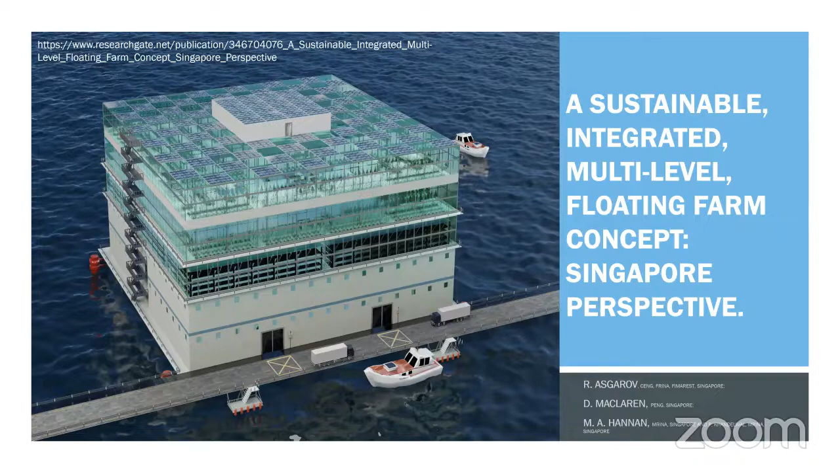Thank you and good afternoon. Today we will talk about floating farms. This is a project which we developed together with our colleagues from our Society of Floating Solutions, founded by Mr. Lim. So we did it together, and it is a job which is designed to demonstrate feasibility of concept. It's very preliminary, so please take a note, and then we'll talk about the numbers.

Everybody knows that Singapore faced a shortage of food, not a real shortage, but risk of shortage during COVID. Generally this is a problem of the entire world. Population is growing and food is in demand. So the government took note from this situation with COVID, and there was a program accepted that by 2030, Singapore is supposed to provide 30% of food locally. We believe that our floating idea to provide food is one of the ways to develop this in the future.

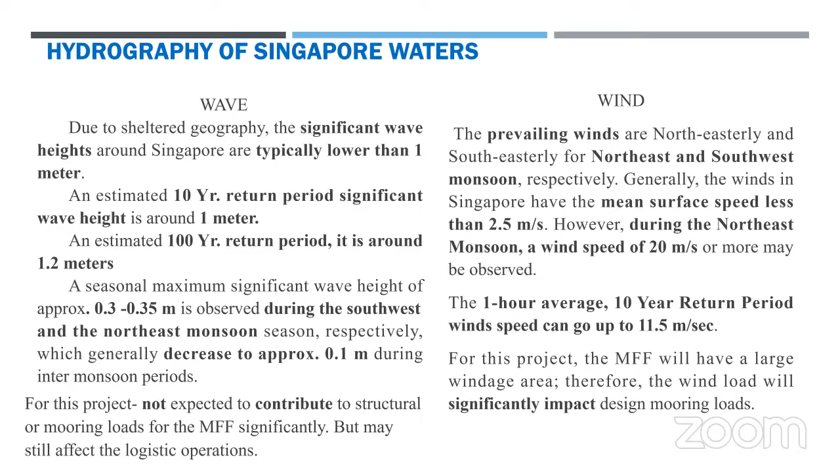Current here - normal current, tidal current is about 0.5 to 1 meter per second. But between the islands and some narrow streams it can go up to 2 meters per second. Wind-generated, non-tidal current is quite low, 0.4 meters per second. But generally the speed of 2 meters is significant and has to be taken into account for mooring load calculation.

When we talk about tides, tides are quite significant in Singapore - it could go from 2 to 3 meters high. But the nature of our project, the decision which we use in the mooring, makes it indifferent to tidal variation, and we will talk about this later.

Not all of this area can be used, we already talked about it. A lot of the area is dedicated for navigational purpose, security or political reasons that can't be used. But still there are plenty of places.

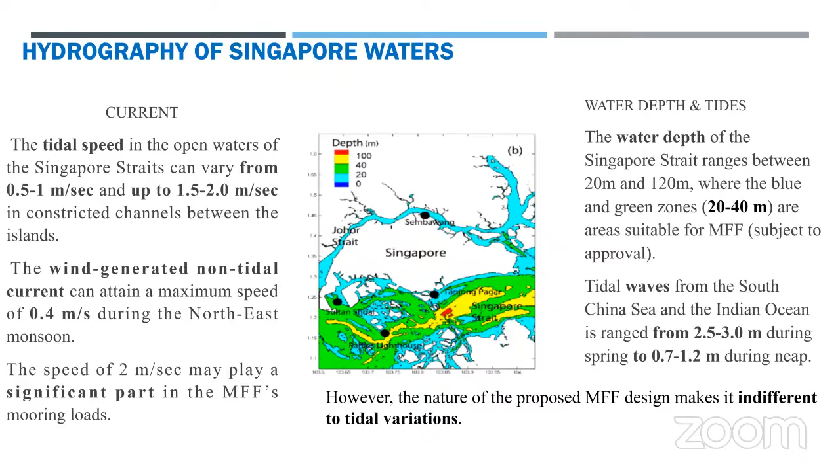This is how our project looks like. We have a 6-story floating farm.

Bottom level, it's not visible here. It's a double bottom and fish farm. First level is a loading bay. Second level is a chicken and egg production. Then two levels of hydroponics, indoor hydroponics. And top level is a greenhouse.

Greenhouse because we have a transparent roof, partially used by solar panels.

Access to this farm could be two ways. One of them is a floating road. If it's close to the shore, then using the floating road we can transport goods with normal lorries. If it's far from the shore, then it will be used by boat and by ships, all logistics.

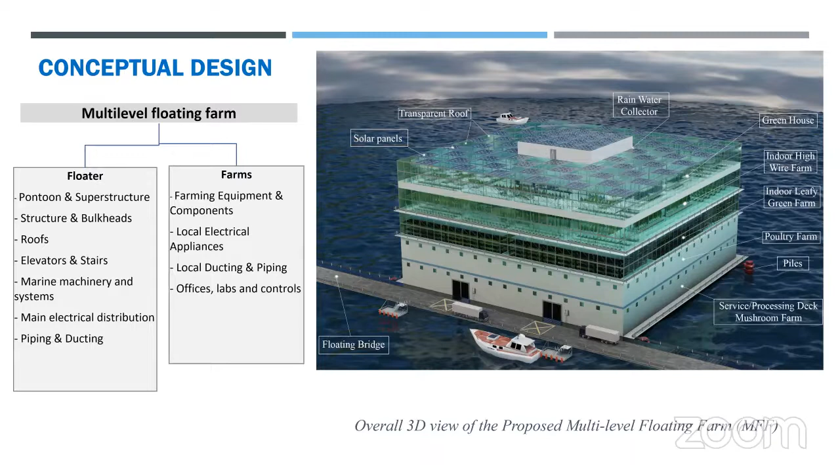Conceptually, if all project was divided by two parts: a floater, which includes structure and all machinery, shipping machinery, and a farm, which includes all farming equipment and everything for production of food.

We will talk about it later. And this is for human location, for laboratory, for personal staff, for workshops.

Overall size of this platform is 60 by 60 meters, which gives us 3,600 square meters total area. And inner part, which is the core area, is about 400 square meters. The rest of each level is 3,200 square meters. It's a production area, which is dedicated for production only.

Total displacement is 25,800 tons. And what I want to mention is stability. It's a metacentric height of 26 meters. It's huge. Normally rules require 0.2 meters to be safe. I would like to keep it in mind because we will talk about it later.

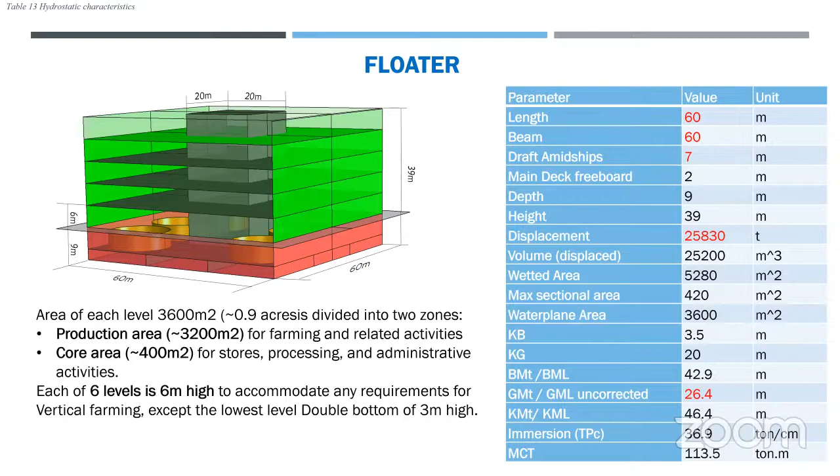So this is a total estimation of the cost of the floater. Of course it's an estimation, it's not based on the project drawings. It's based on the analogy, on the prototype. But it gives us some idea about how much it can cost. We believe it costs about 30 million plus.

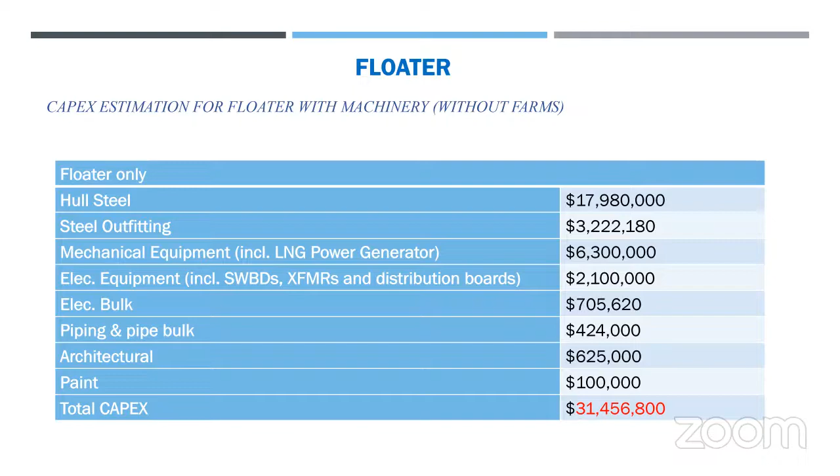Core area: we discussed about core area, and every level is 6 meters high. So far we have decided to divide the core area into 2 levels, 3 meters high each. Lower core is mostly for anything which is related to production. It could be laboratory, processing room, control room, anything which needs to be on the level of production.

Upper core is actually optional. It's more for comfort of the crew. If this platform, if this farm, is located near the shore, the crew can be delivered every morning and go home on the lorry in the evening. If it's a bit far, then we need to have a crew stay on board on watch. And for that we have an upper core with cabins and everything for crew living on board.

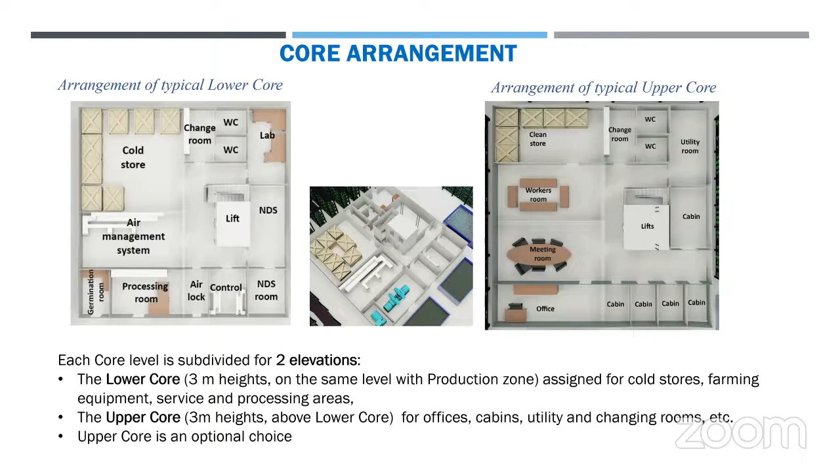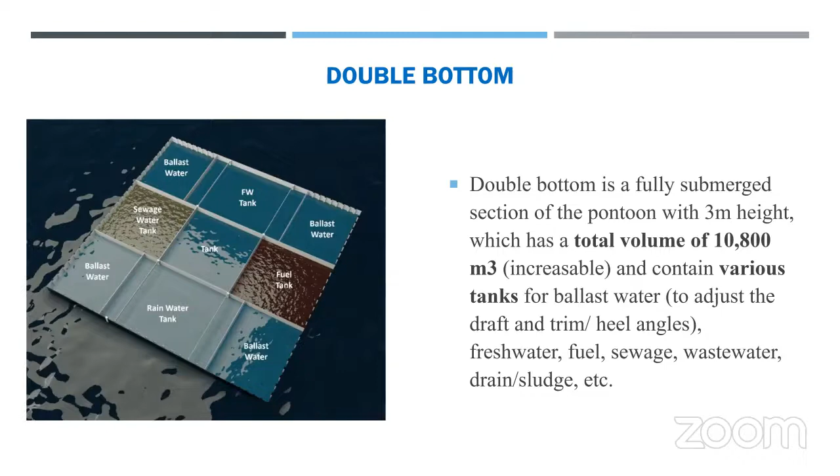Ground level: it's double bottom with the tanks. It's not an actual tank, it's just indication of intention, nothing else. But you can see that there's fuel there, sewage water there, fresh water, rainwater, and ballast tanks. Ballast tanks we need to keep the draft level on the same level with changes of loading. Total estimated volume is 10,800 cubic meters.

Ground level, level 0, it's partially underwater and fully below the main deck. It's a fish farm. It consists of 6 round tanks, total volume of 6,000 cubic meters. It consists of auxiliary equipment for fish farming, which is hatchery, nursery, recirculation system, feeding and control system, pumps, etc.

And also it includes some part of ship machinery. First of all, it's engine room, pump room, control room, switchboard room — something which is noisy. We keep it underwater. We don't go deep into the numbers, so just for information.

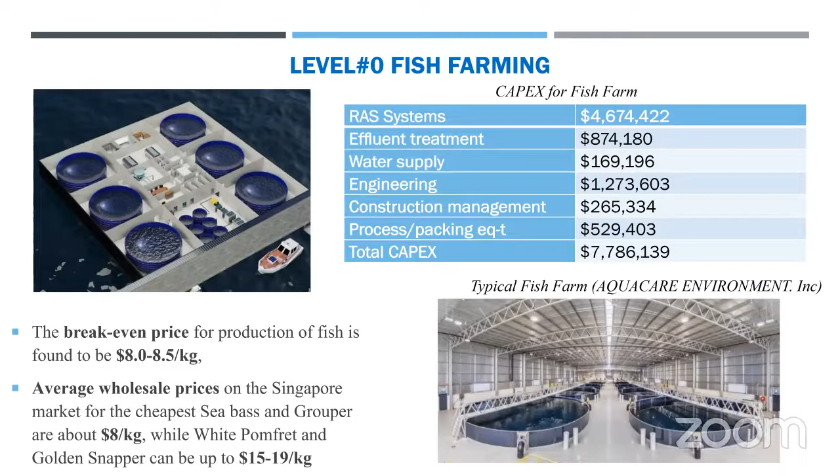Next level is the loading bay for lorry to pack it for general storage. Then we have another part of the machinery, the floater's machinery. And the rest of the room is occupied by mushroom farm.

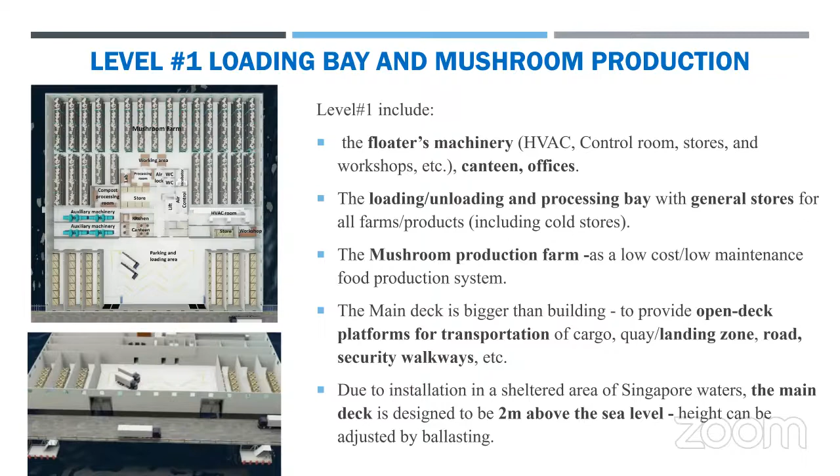Mushroom farm is a less demanded and cheapest farm. They don't need water, they don't need light, they don't need air, little bit. So it can be placed anywhere, but it's very important part of integrated farm. We will talk about it. This is typical farm, just somewhere.

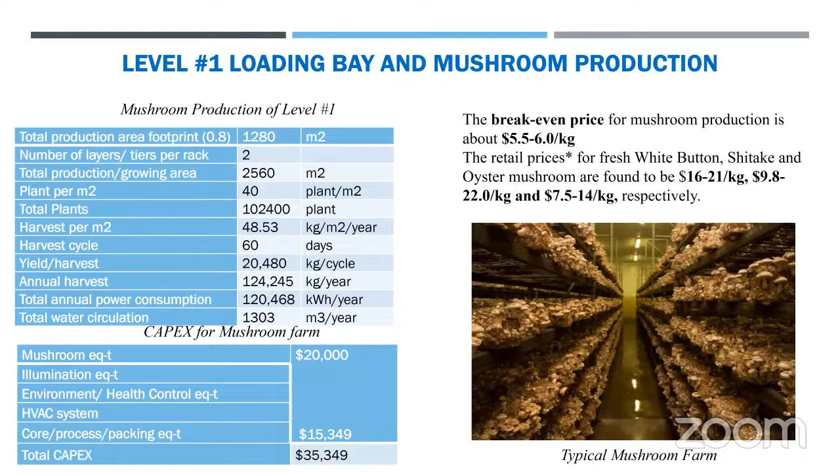Level 2 is an egg and poultry farm. It's a caging along the wall, which is where chicken stay. As a prototype for this project, we selected a high-tech farm, very expensive one, with automatization of the egg production cycle, including battery egg line, temperature control, scientific feeding and mechanized egg collection methods. This was done for a conservative approach in our estimation.

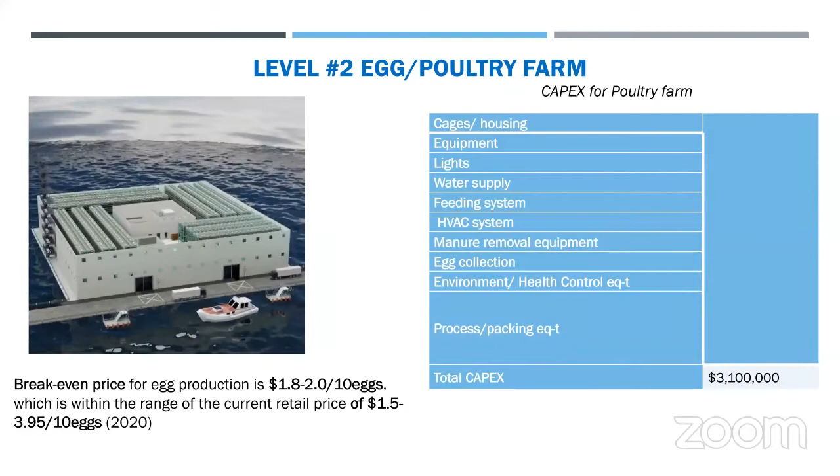Level 3 is a leafy green. We select lettuce production for this level. It is rows of shelves with the greens on top. We select 4 tiers per rack, which is 1 meter high, especially to get it more open for sun to come in.

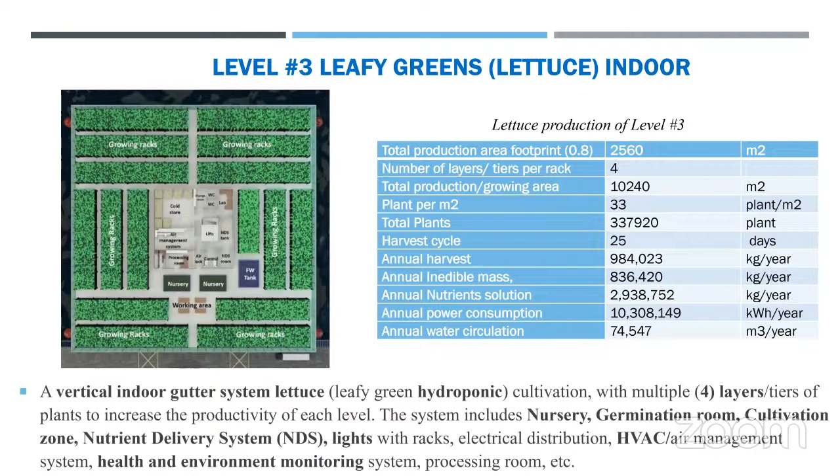This is also quite a high-tech system we selected to be conservative in our estimation. This house looks normal, quite dense tiers with small distance between them, but it requires a lot of energy for lighting, artificial lighting.

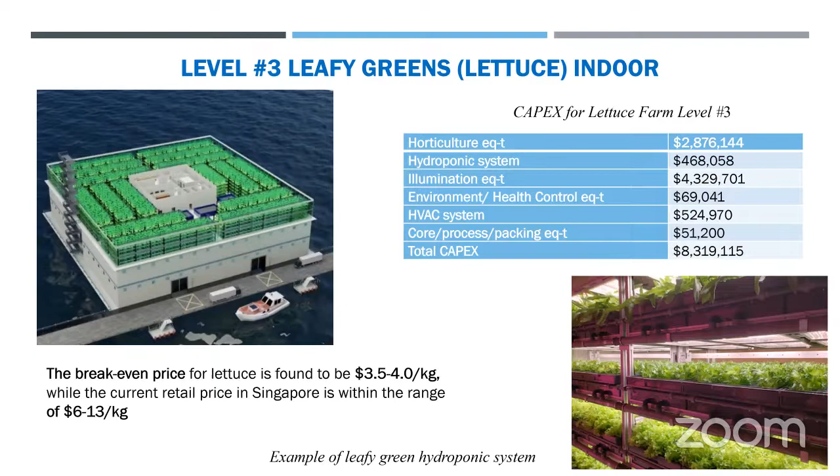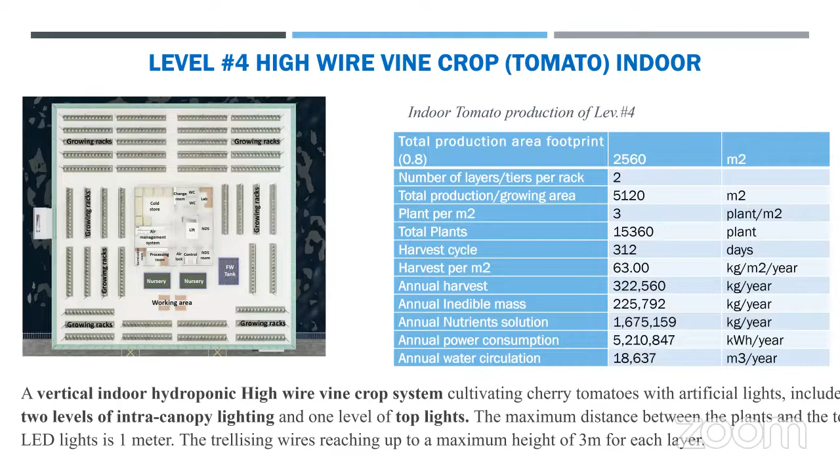Level 4 is also indoor hydroponics, but a different kind. It is a high wire vine crop. We select tomato. The difference is that it grows on vertical wires, and we have used 2 tiers for it, each one 3 meters high. It is also hydroponics because it's indoor, it's closed.

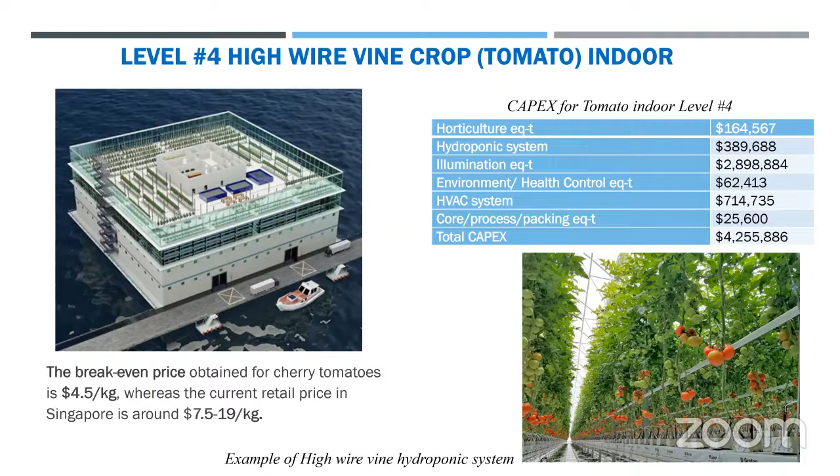Level 5 is the same tomato wire system, but it's already a greenhouse. It has a transparent roof. Its difference is really reduced power demand because there's much more light there, and we reduce the cost of electricity. Everything else we keep the same as for level 4. Now it's another sample of the high wire green arrangement.

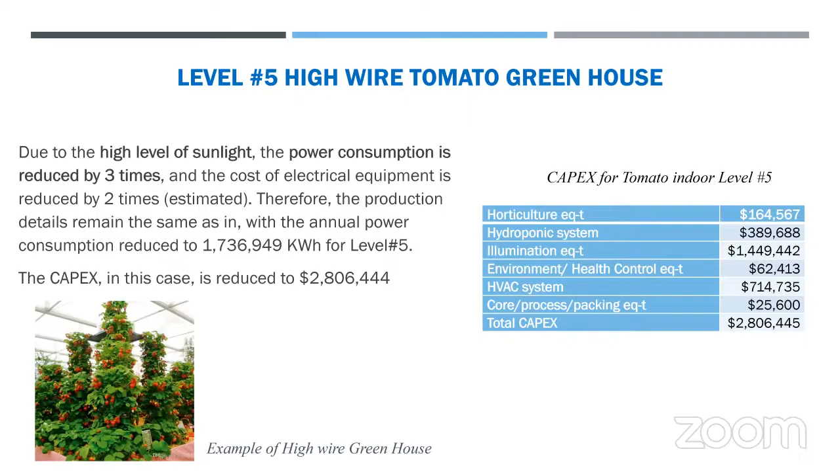Mooring. We need to say a few words about the mooring system. We considered different types of mooring systems, but we believe the best is piling. Piling is the cheapest and easiest installed among all, easy to connect and disconnect, easy to remove and transport the system to another place. It's the least harmful for the environment, and it can be done independent of the tide and level changes using this kind of rollers. This is quite standard equipment.

So in our case, the mooring system limits horizontal transferring. It doesn't limit vertical movement. So we can ballast, deballast, we can allow it to change with the tide. That's quite useful in this case.

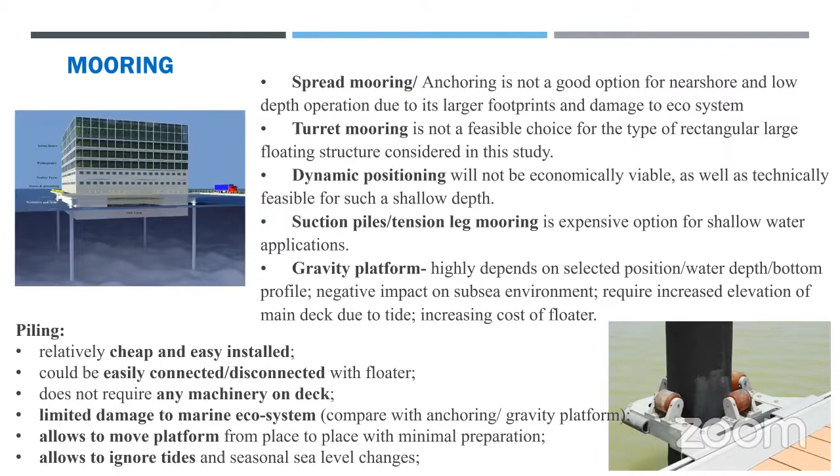So what are the benefits of our project? First of all, you need to understand that we selected 6 levels, it's just an example. We talk about stability. We have plenty of margin of stability. We can build 10 stories, 15 stories. Of course, it needs to be checked, but preliminarily, we can build much more levels.

The most expensive part of this project is the floater. The floater and its bottom part is machinery. Building each level on top of it is quite cheap relatively to this. We just need to increase the size of the farm, the capacity of equipment a little bit to compensate for one more level. But one more level adds a lot of profit from the production. If you compare the things, you see that each level added to this platform reduces the cost and price of the final production.

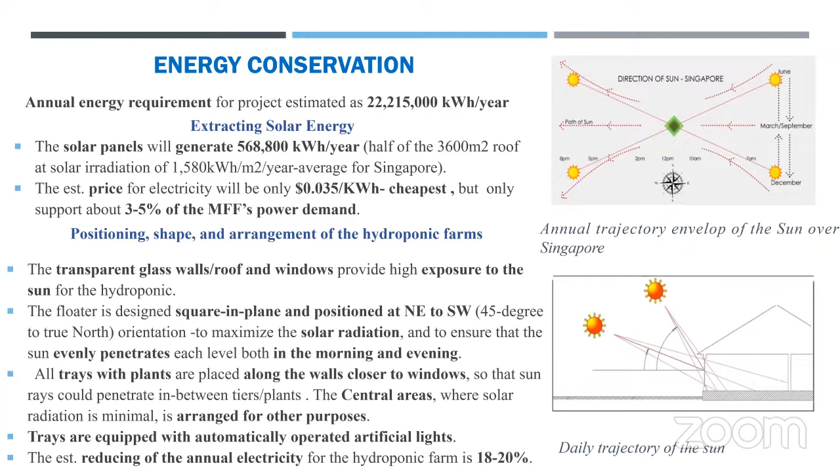Water conservation is also a way to conserve. First, we need 40 to 50,000 cubic meters if we consider seawater fish farming, and about 600,000 cubic meters if we consider freshwater fish farming. But don't be scared of these numbers.

We have a lot of ways to save. First, condensing water from air conditioning. Just condensing from 33 degrees to 23 degrees, a comfortable temperature, we can get about 8,000 cubic meters per year. It's just normal condensing, but we also have a lot of evaporation from the greenery added to this, which depends on the green and the season. It's really difficult to evaluate, but it's quite a lot, maybe double this number. All this water comes back to the system and can be used again and again.

Another way is harvesting rainwater. We can harvest about 8 to 9,000 cubic meters of rainwater in Singapore using the size of our roof. This also gives a lot of savings. If we exclude fish farming, we can get about 20% of the demand of the rest of the farm. With fish farming, of course, it's much less.

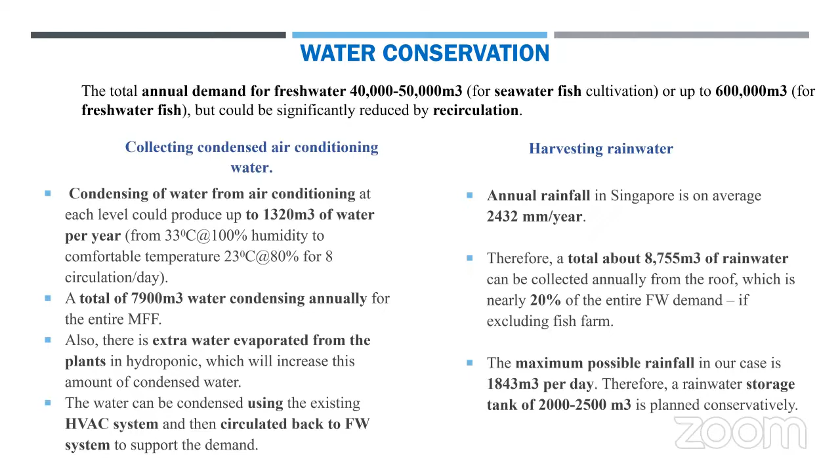Another benefit of our project is integration. What does it mean? The farms we use are not standalone farms, they work together. First and most important, it's integrated waste management. For example, poultry farms produce a lot of manure, but manure has been used to feed fish farms for centuries in Asia. It's a very old, famous, and well-known technology. With a little bit of processing, this manure can be used to supplement fish feeding.

We need to create a special ecosystem for that, with some special fishes, seaweeds, crabs, and shrimps, but it gives us quite a lot of advantage. You can see here in the table, the coefficient of production is increased when you use this multicultural ecosystem, up to 4 times.

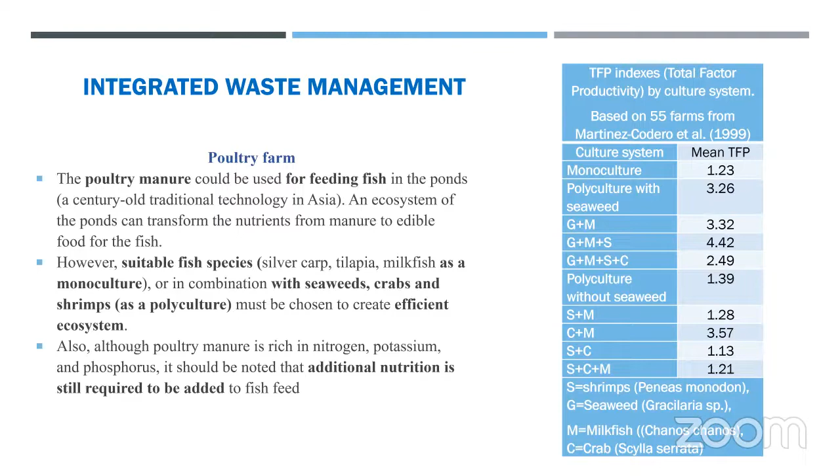Fish farms produce a lot of contaminated water. The water needs to be renewed at least 2 times a day, and it's really contaminated. But this water is a good nutrition source for hydroponics. On the other hand, if we use saltwater fish, it could be processed through a freshwater generator to produce a lot of fresh water from used water. So we don't only clean the disposed water, we also produce a lot of water.

So we check this efficiency of the products based on two modes of operation. Build to order is when the owner builds it for themselves and produces their own food. This has a lot of benefits and disadvantages. Mostly the owner plans and decides which foods to grow and how to integrate it. All the management and marketing is shared, so there's a lot of saving on it. It's the most efficient way, highly risky because it's more expensive, but gives more profit.

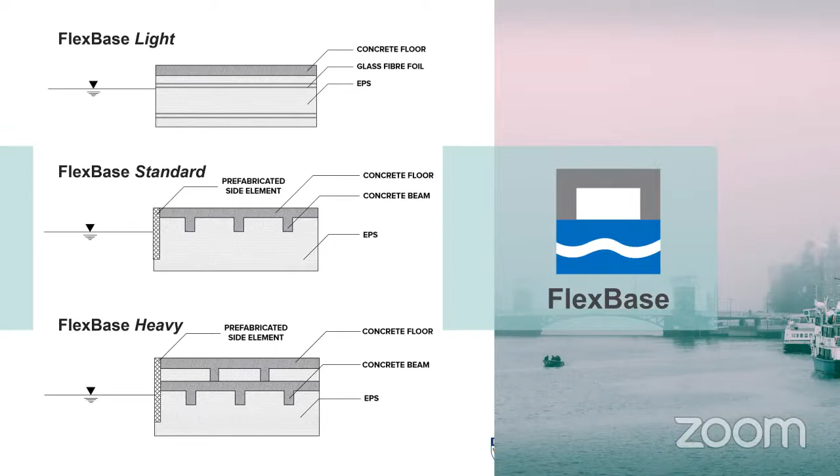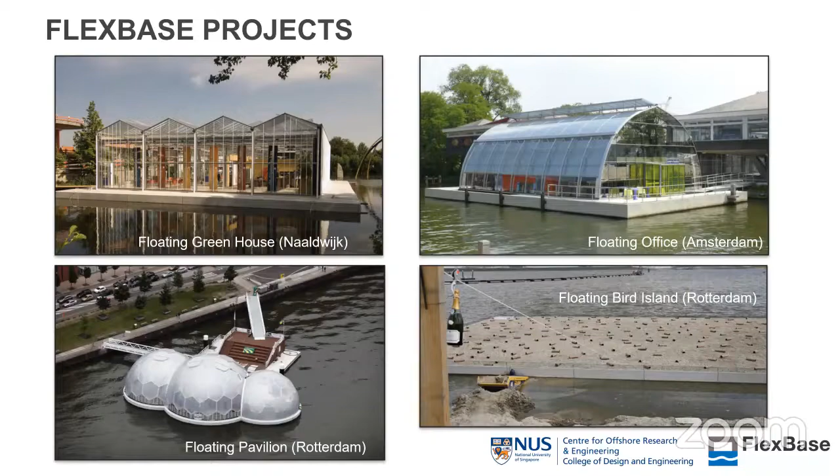So let me go and see this farm that we have. It's actually a very simple farm that is built in compartments. Of course, you can expand this, but it looks like a barge from far, made of concrete as a base, and then a portal frame on top of it.

So it's actually a very simple design. We don't have multi-story structure in there. Hopefully the video plays. Video plays? Yep.

A short video that's actually created by my student to show you how the farm looks like. So you can see it's a portal frame on top of a concrete building, a concrete base. We're using FlexBase solution. It's a very simple concrete steel structure, a very simple portal frame steel structure on top of it, 3-story high, suitable for the FlexBase standard products.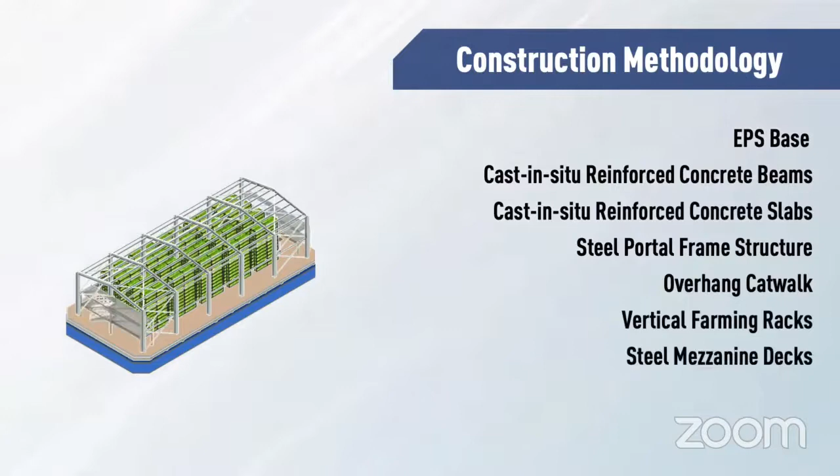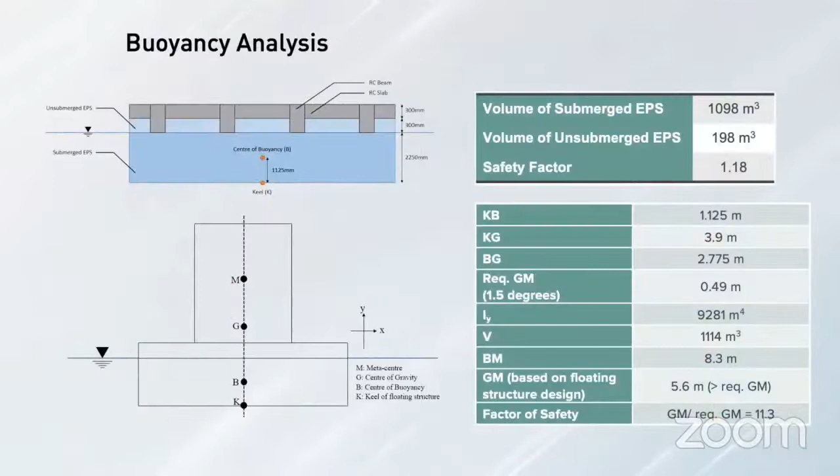I think if you're a naval architect, you'd say this is easy to design, right? There's nothing complicated about this. Even a student can design this. So nothing difficult, but I'll cover later on some of the challenges we face, non-technical challenges. The mooring systems are very standard catenary moorings.

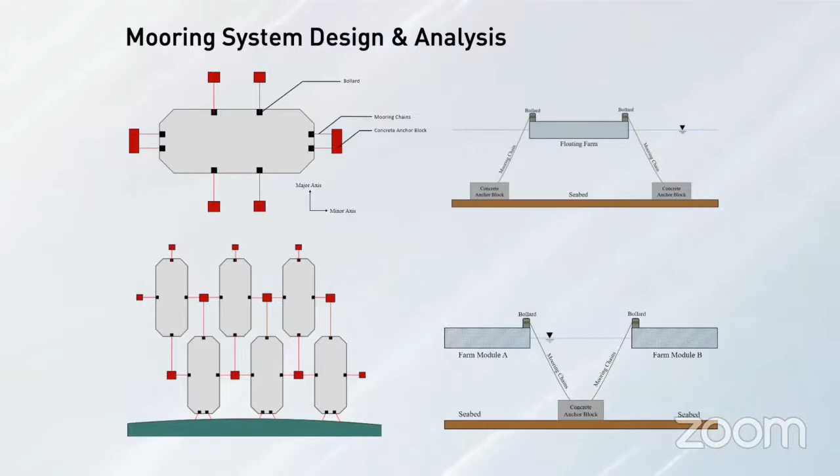So since you've seen the video, again, very simple structure, steel portal frame. The reinforced concrete slab is made of concrete, and then the FlexBase pontoon is actually where the EPS is, the expanded polystyrene. Of course, we use the standard one, which allows you to build a 3-story building.

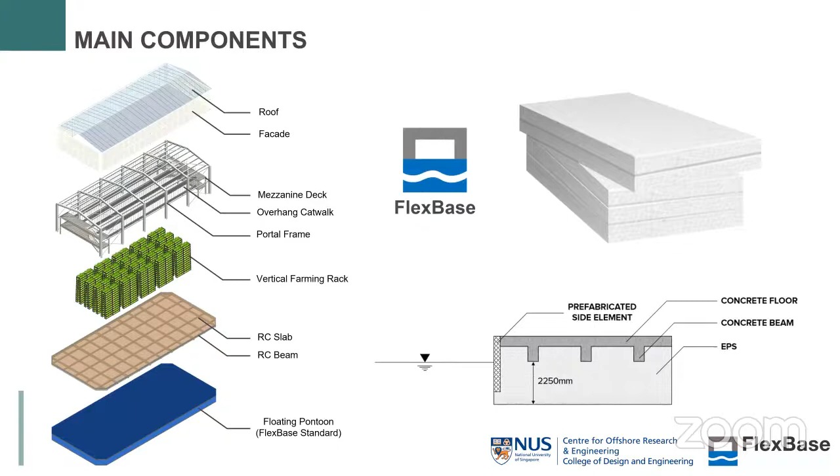And then the concrete slab and the transverse beam, longitudinal beams are just standard reinforced concrete that you design for buildings. I'll just go very quickly. This is how it looked like eventually.

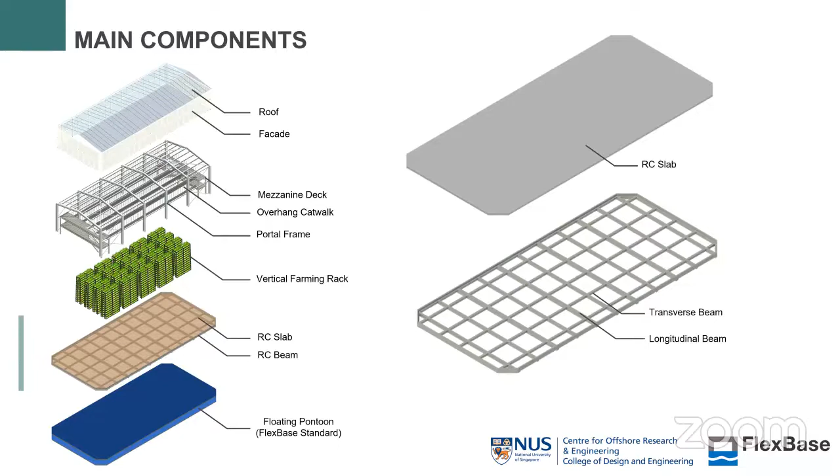Design summary, I guess floating building is a bit new in Singapore, right? We really haven't designed a real floating building. We have floats, marina floats in there, but we don't have a building that's designed to house people and offices.

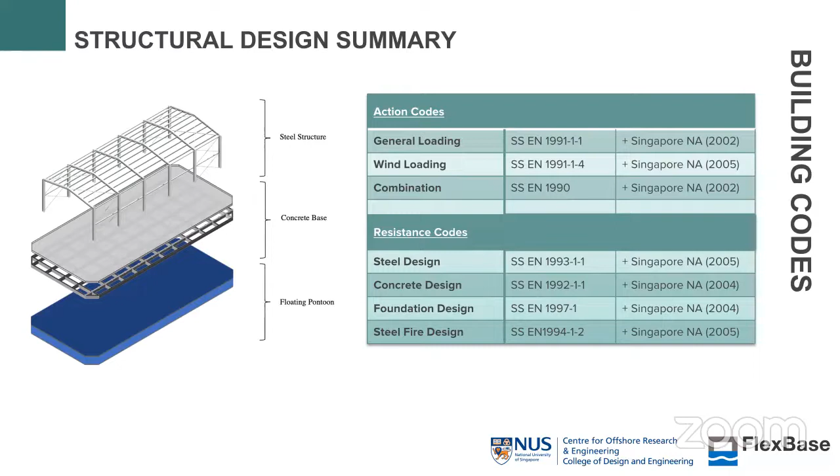So when it comes to codes, if it's a civil engineer, we follow all the standard Euro codes, with the annex, Singapore annex to it. And we design according to that for the actions and the resistance for the concrete design. But as a marine engineer, you know that the Euro code doesn't cover things like station keeping, stability, watertight integrity. So we have to use other codes, IMO codes, API codes to substitute to do the subsea design.

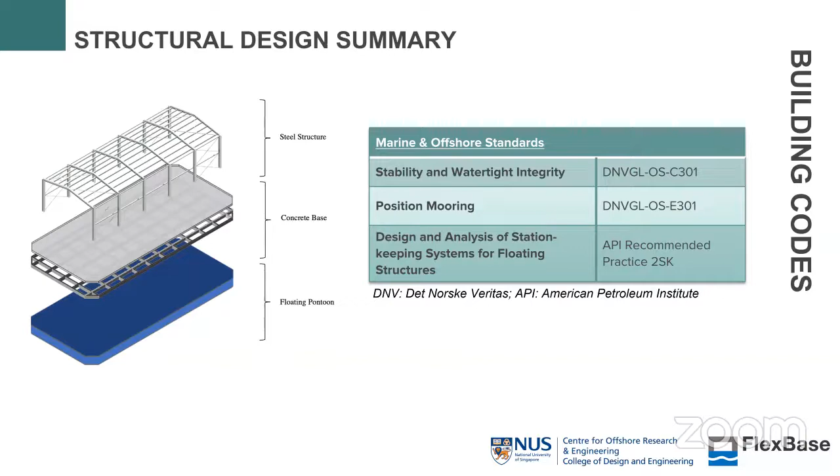This is just the steel portal frame, and that's the concrete slab there. And then any civil engineer would be able to design this using Tekla Structural Designer, simple slab design.

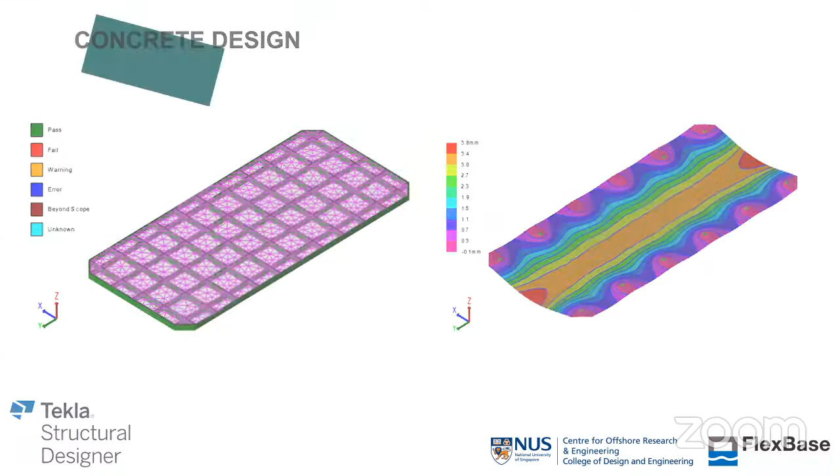So the construction of it, as I said before, you're using styrofoam purely for the buoyancy force. So the styrofoam are glued together first to create that base for you to cast concrete. And I'll show you some pictures of the construction.

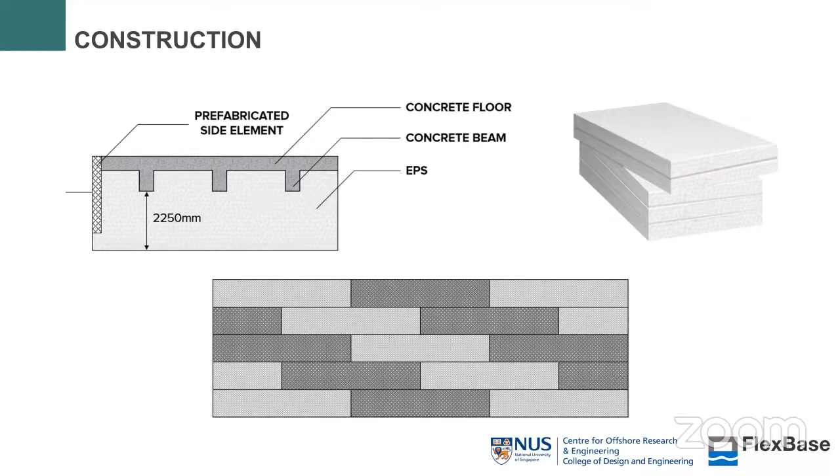So this is the actual construction of the Rotterdam floating pavilion. You can see the styrofoam is used as a buoyancy base so that you can cast concrete on top. In the styrofoam, you actually have lines there for your longitudinal and transverse beams. So once you form the base, then you actually cast the concrete on top of it.

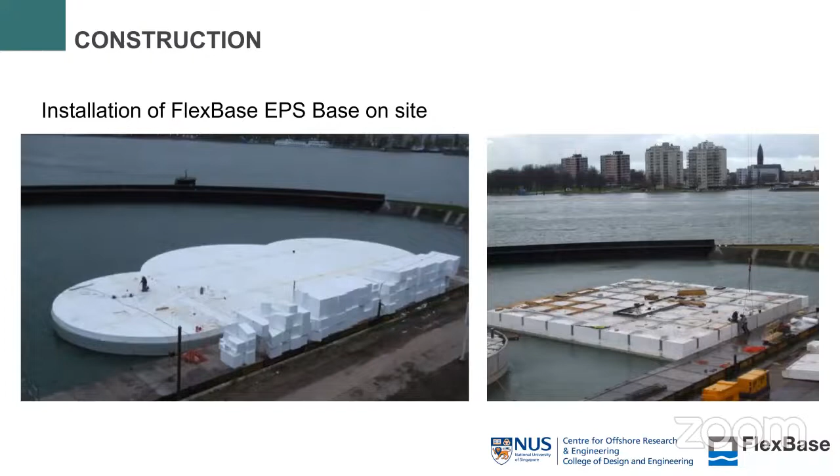So you can see the concrete is being cast there. On the bottom, with the white surface, that is the styrofoam. You cast the concrete for the beams, and then once the beams are cast, you cast the entire slabs on top of it.

The good thing about this is you don't need a dry dock. You can build this in a calm basin, a reservoir, in situ, a small structure. You don't need to pull it out, build it somewhere in a dry dock and pull it in. You just build it on site.

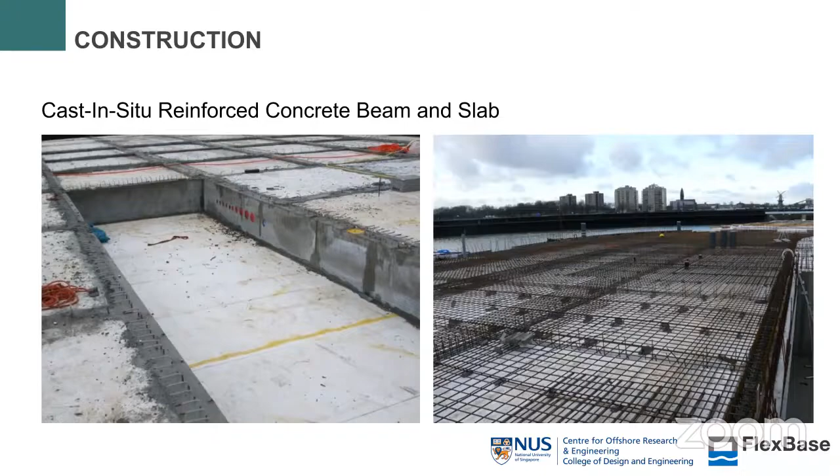So those are technical challenges, which I think are very easy to solve for a naval architect. Let's look at the non-technical challenges in the Singapore context.

Currently, if you design any floating building in Singapore, there are no guidelines and legislations for any floating structures, whether farm or buildings. There's no real guidelines. So if you look at coastal development in the sense of not a ship, for buildings or farms and anything, or even hotel, there are two locations.

Either you do very coastal inland, you build a gangway bridge stretching out, you can have road access, everything, you connect your water and electricity to that. It could be a ferry terminal, for example. Or you do something quite offshore, further out, because you need the water depth. You have a certain draft, you need a water depth, you need to build this further out.

Then the gangway bridge doesn't make sense. You have to transport everything by ship. Hopefully you lay a subsea cable, otherwise you generate your own electricity. And Singapore is all still diesel generators, right?

Even our islands, Pulau Sebaru for example, are still burning diesel to generate electricity, although Pulau Sebaru is so near to Singapore. We don't have a subsea cable to connect it.

So if you are an engineering company trying to sell solutions to a developer, they'll say, wait a minute, if I do it offshore, I have to generate my own electricity, distill my own water, the whole lot, right? It's basically like a ship. So my cost is going to go up.

If I do it close to shore, which is much better, then you don't have to deal with water depth issues as much, but then your draft is limited. And if our tidal difference is plus minus 2 meters, at low tide there's a risk that your structure may get stuck in the mud. So you need substantial depth for the draft. So you have this dilemma.

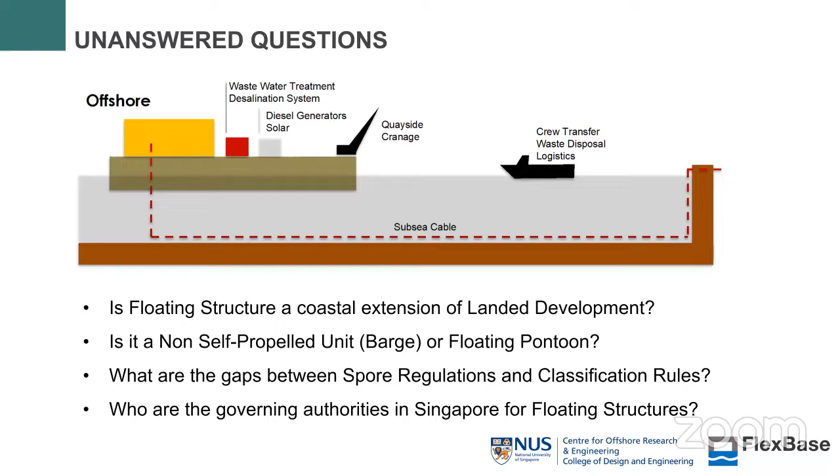At the moment, who is the governing authority for floating structures? Actually, it falls to two parties. Let me go through this. If you go to any planning development in Singapore, the first part is you have to go to URA, Singapore Land Authority, MPA, and NEA for floating structures.

URA is basically looking at the master plan, whether it meets the plot ratio. Singapore Land Authority checks if you're taking some of the coastal land. MPA checks whether you're interfering with the sea routes. And NEA makes sure you don't have any discharges that are damaging the environment.

Once you've done that, the real building control authority is just BCA - the only building control authority. Whether you consider it a floating structure or not, BCA is the only authority that needs to approve the building structure. The rest - fire safety you've got Singapore Civil Defense, utilities PUB, and then NEA again for the full EIA.

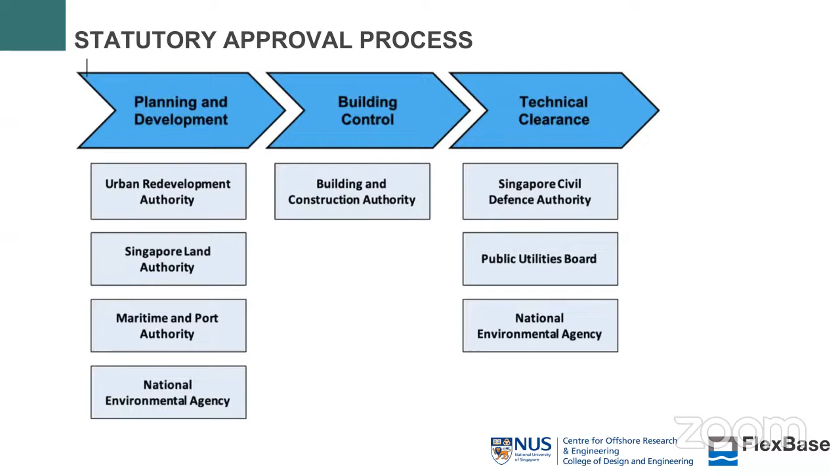So let's look at building control. We look at the Building Control Act, Section 2 - this is the actual legislation from BCA. There is a definition for floating structure: it's defined as not being a boat or vessel, constructed or to be constructed on a floating system supported by water, not intended for use in navigation, and permanently moored. If you satisfy these three criteria, your floating structure is considered a building structure.

Like any landed development, it's considered a building structure. This additional clause was added around 2006 or 2007 when they built the Marina float, because it was the first ever floating structure built here. BCA had no way to govern that - what do you even call that, what's the Marina float like? So they added this definition to satisfy the requirement of the Marina float. It's called a floating structure because the Marina float is permanently moored, not used for navigation, and supported by water. Therefore, it's considered a floating structure.

Sounds great. But if you apply this to all the fish farms in the Straits of Johor, built using wood and plastic canisters, then all the fish farms, in theory by law, are considered building structures, which means BCA needs to approve every fish farm on the Straits of Johor. But if BCA were to go and inspect all these fish farms, they would all fail an inspection, because these fish farms built using wood and plastic canisters were not designed to Euro code. There's no quality control, the fire safety hazards - they would all fail BCA regulations.

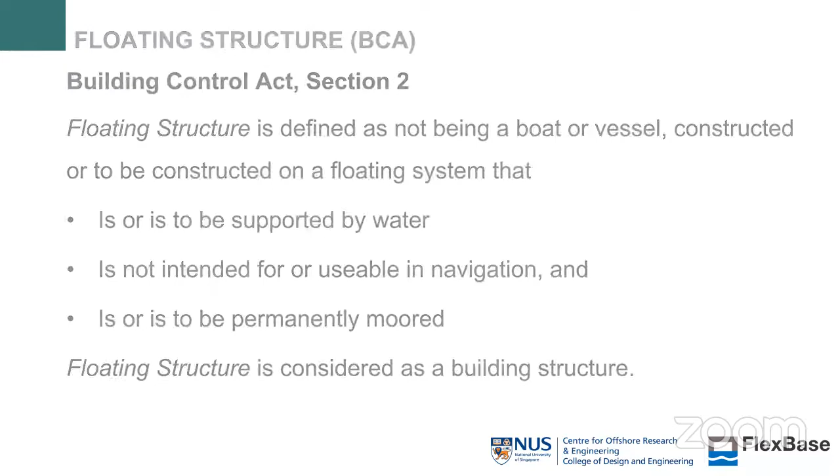So if it's a building structure, let's say you're building a floating ferry terminal connected to land, they'll say follow our BCA building safety codes, these are the codes you need to comply with, right? Again, by law, BCA do not recognize any DNV, ABS, Norsok, whatever code is used for marine structures. BCA does not officially recognize them. They only recognize the Euro codes, the standard Euro codes for design.

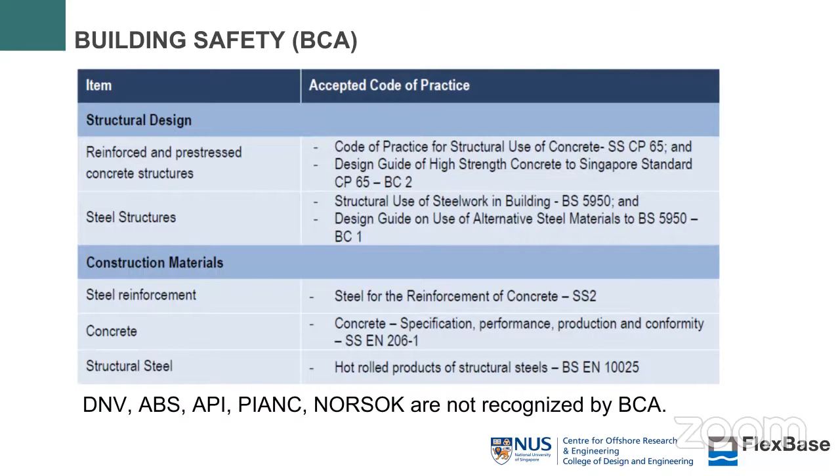Of course, you also have the problem of URA, which has this gross plot ratio you have to comply with based on the master plan, right? Again, for floating structures, there is no similar quantum use for floating structures in Singapore, because floating structures are not considered as land development.

If you talk to URA, they will tell you the Marina float that was built in 2007 was considered a temporary structure until today. Because when they built the Marina float, it was meant to be a temporary structure for the national parade, since the national stadium was under renovation, basically under demolition, and they were building a new indoor stadium. So they built the Marina float as a temporary structure. And ever since 2007 until now, URA has always considered it a temporary structure because it doesn't satisfy the quantum use of land.

But the Marina float is not an efficient use of land, it's just a piece of flat surface, right? So now they're going to demolish it and build a permanent structure there. So the Marina float is going to disappear, right?

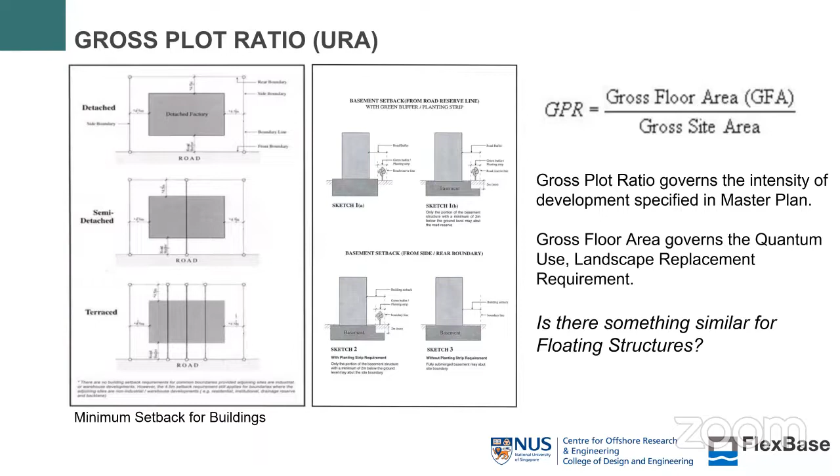Okay, the biggest problem, I think, for all engineers, if you advise a client, the next thing is OPEX, right? Back to the question, is it a building structure or a marine vessel? If you consider it a building structure, then the Building Control Act in Singapore governs all inspection of buildings.

And actually it's quite relaxed, because imagine if there's a non-residential building, a farm, a ferry terminal, then inspection is only the first 5 years and thereafter every 5 years. The inspection is only visual inspection, any loading or alteration of the building, nothing else. Simple, right? If a residential building decides to build a floating house, then the inspection is first 10 years, then after no less than 10 years. Very simple, makes your life very easy.

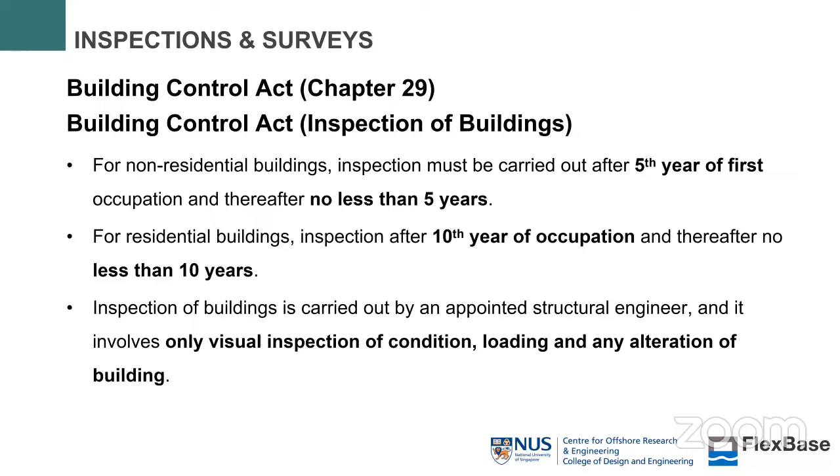Now, the issue is whether I can build a house using a concrete or steel pontoon, a big difference in terms of corrosion. But if your floating structure is further out to sea, BCA says it's nothing to do with us, it's MPA's or Singapore Food Agency's problem, then you fall into the classification rules for ships. I'm using DNV as an example here. If you consider floating structures as a vessel, like a pontoon or a barge, then the surveys are more stringent. It's an annual survey, then 2.5 years, 5 years, and eventually a bottom survey. So there's a huge difference in terms of OPEX.

So it's a big, one of the biggest problems if you want to develop a floating structure in Singapore, is nobody can actually lay a hand and say this is going to be insured as a building, follow the Building Control Act, or this structure is going to be insured as a vessel, and please follow the DNV rules of ship inspection every year, 2.5 years, and 5 years. Especially if you design your pontoon as steel, I would say you should at least follow this and not inspect only every 5 years, because steel corrosion is inevitable.

I think that's about it. So thank you very much. These are challenges. I do not have the answer for it. Hopefully we'll open up some thoughts and discussion.

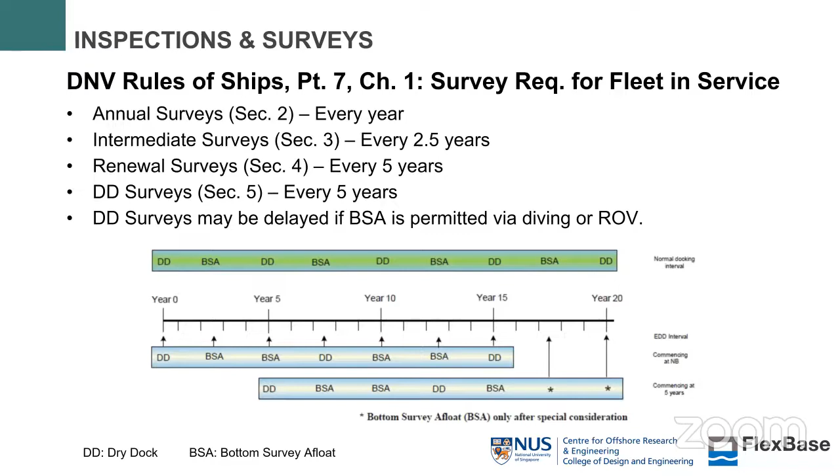I think marine engineers, we can design a lot of things on technical solutions. It's all very easy, right? But when it comes to approaching authorities, getting approved, getting insured, then it's quite blur. It's a very gray area in terms of floating structures, in terms of not building a ship, we're building a house, a farm, an agriculture farm. It becomes very gray at the moment.

Right, thank you very much. Thank you.

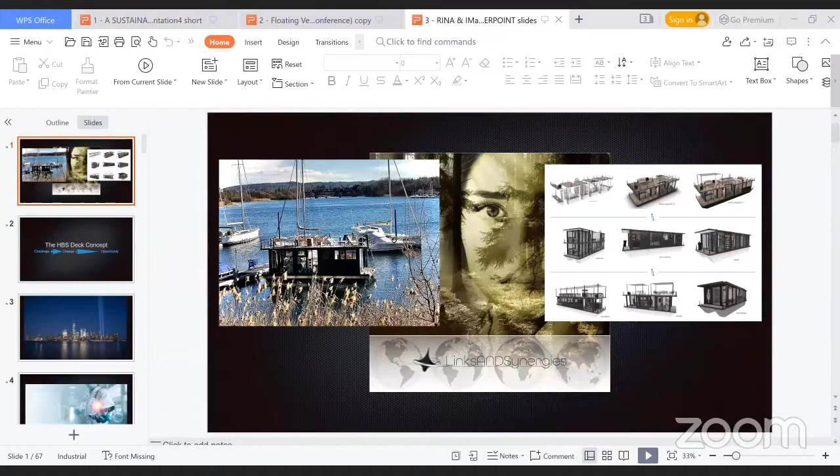Good afternoon, ladies and gentlemen. Thanks for having me in the first place. Quite an experiment for me, as I'm an absolute beginner in this. I am pretty sure you'll enjoy my accent throughout this presentation, my heavy accent. Luigi Marco Checonelo, that was a good attempt, by the way. Not even Italians can manage to say that, so you are excused, absolutely.

So I would like to start my presentation talking about some wording, which is key for us. We are talking about this the whole day. Change and challenge. One word contains the other, isn't it? And that's true for their meanings too. So in nature, change is a challenge. And in fact, it is only when we are challenged that we truly change.

I guess many of you know this picture. 9/11, 2001, 20 years already. At that time, I was barely 2 years into my professional airline flying career, and I have really been locked up into the cockpit for the rest of it. I don't even remember how it feels taking passengers from A to B without a reinforced bullet door behind it. It was quite a challenge for me. I spent my career with this bulletproof door, as I said.

I am pretty sure that 20 years later, 20 years and 15,000 flying hours actually later, I remember getting increasingly uneasy to walk around the crowded airport terminals. I remember literally holding my breath and dodging passengers left and right to go back to the same door, the very same hated door that was in my cockpit to protect me from the passengers. So that was the beginning of another challenge.

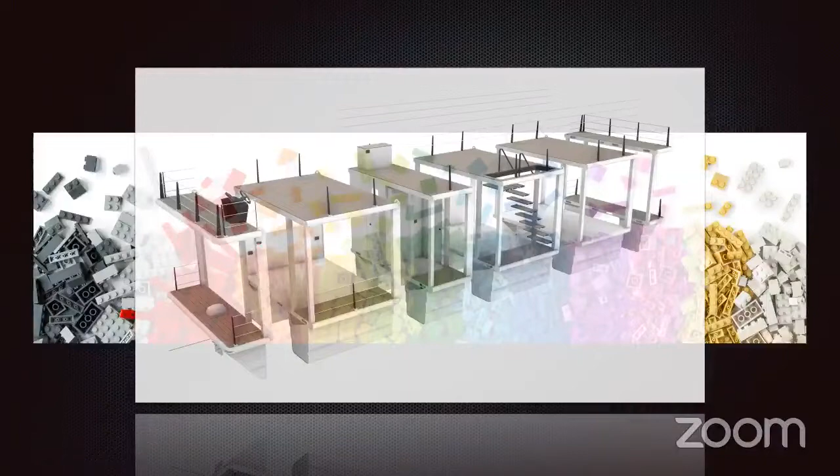Global warming, extreme weather, and rising sea levels are all part of the same problem. And it would be a waste for me today to reiterate the obvious with more alarming statistics. So I choose to add more words instead: sustainable, versatile, resilient, and easily movable. These are all words that relate to change. And coincidentally, the same words are describing the deck concept, which is a solution to reevaluate the water as a dwelling element.

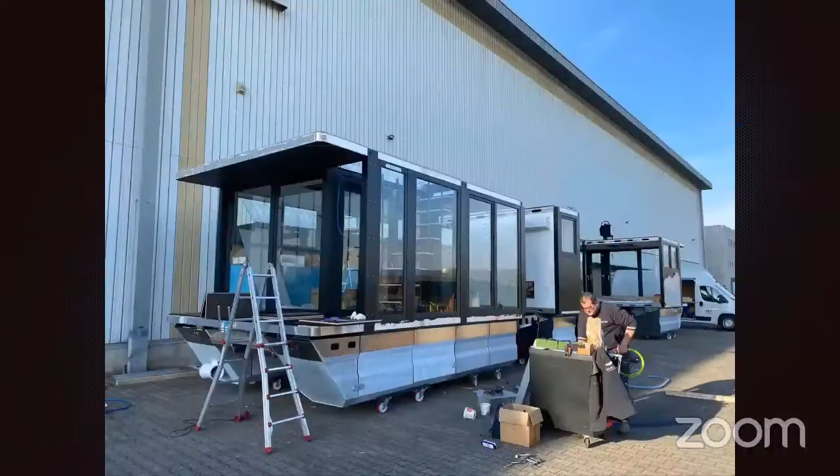These are the images you can see for the modularity. The slides are slipping away, but you'll understand when I say the rest. So said the Italians during the Italian brainstorming, which I've been lucky enough to participate in. What if we manage to create a habitable structure which is effectively able to cope with change of purpose, change of shape, dimensions,

along with easy assembly and dismantling procedure, and of course fast development at minimal cost to the environment. It is a fact that we essentially have not changed the way we build our living and working infrastructures for hundreds of years, and that is because we have not been challenged enough to do so until recent years. There are, however, several well-consolidated habits around the westernized world especially, and slowly but surely the building process is shifting towards sustainability of materials and solutions to produce, retain, and save energy more efficiently. So we must push the right technologies today and connect the ideas around these technologies to produce buildings that are resilient to change.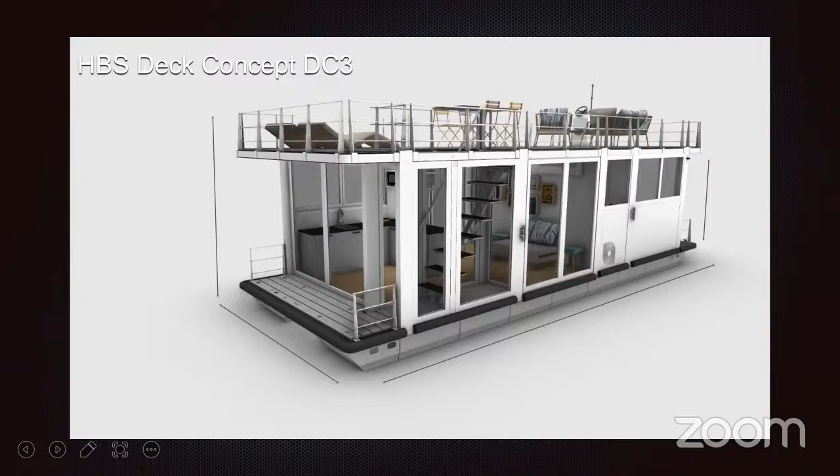Some details about the deck concept, the dimensions. The basic model is the DC3, deck concept 3, 10 meters in length by 4 meters in width, 3.6 meters to be precise, structure. For those who like to reason in feet, we're talking about 30 feet by 12. Floor to ceiling is about 2.2 meters. Board that is below the length of 10 meters - in fact, the deck concept is 9 meters and 99 centimeters, so that makes this virtually non-taxable.

And guess what - in two wonderful locations, the HBS company is creating hotel and floating villages north of Italy, the very few, actually the only one at the moment coming up with this. So imagine these hotel rooms in a permanent berthing infrastructure which can be moved away - I find it very cool. The DC3 is the smallest option offered for this living solution, 10 meters by 4.

These are more images about it. It comprises a living dining area, and a second room, which I call it a second room - it could be a studio or a bedroom. And then there is access with stairs to the rooftop. The rooftop is mainly a terrace, and it's the same surface, exactly the same area that you have at the bottom.

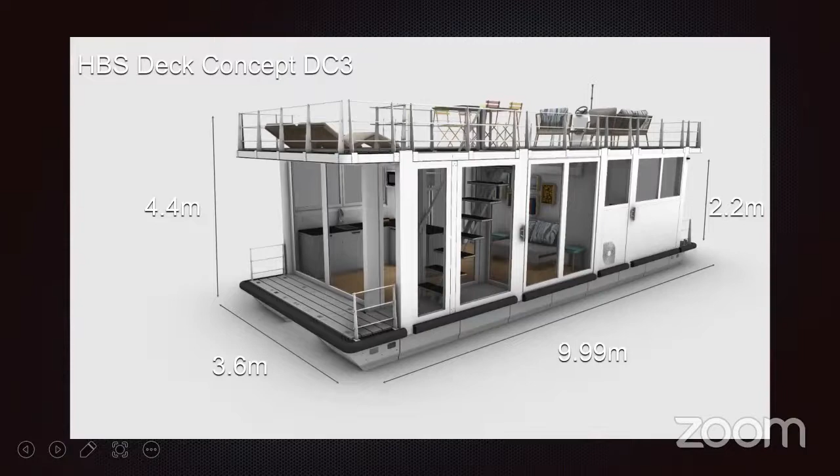The maximum length of the deck concept, being a modular structure of course, is 24 meters, 80 feet. This is a limitation that is not dictated by design, but by maritime law in Italy, since beyond this measure, safety on board requires the presence of a captain, which would make the project not feasible.

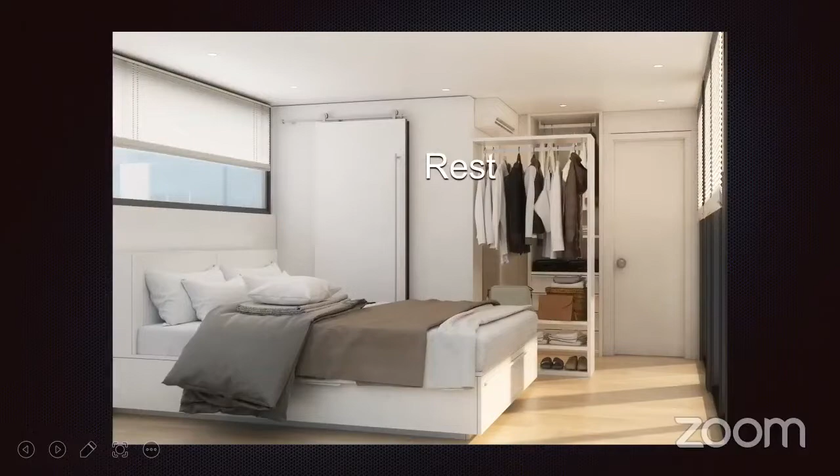Let's talk about the materials. 5083 aluminum alloy, main material together. Let me give you a slide - it's from a few days ago, news from Matteo Costa, the designer, that he has managed to reduce the weight of this model by about 1 ton by redesigning the floaters.

So instead of aluminum at the bottom, they're going to use some sustainable plastic, compressed plastic, that is also resilient to the water element. And the design has also managed to improve the amount of passengers that can be carried on board - so we went from 10 passengers to 22 passengers.

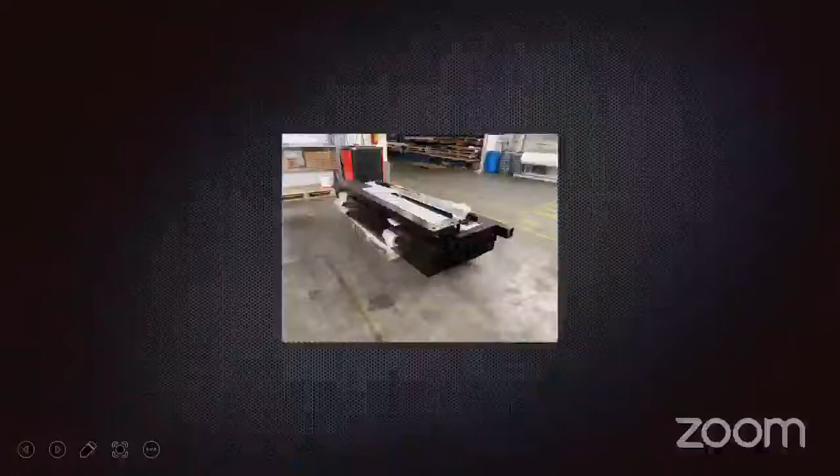Modular design is perhaps the quality that has convinced me the most of the deck concept's potential. Imagine an infrastructure that can easily shrink or expand by adding or removing modules longitudinally, laterally, and vertically, which minimizes the necessity of scrapping and rebuilding a structure completely. So you can virtually reuse and modify it the way you like. At the bottom, the floaters are all divided and singularly sealed, which increases safety of the overall structure because damage to a single floater will not impair the overall structure.

Anything from a price perspective? The designer happens to be a professor at the Politecnico di Milano University, Masters of Yacht Design, and he has put together a Concept 3H hotel, with 2 stairs and 2 toilets to access the common areas, making it work perfectly. Let me show you that - these are still slides regarding the hotel.

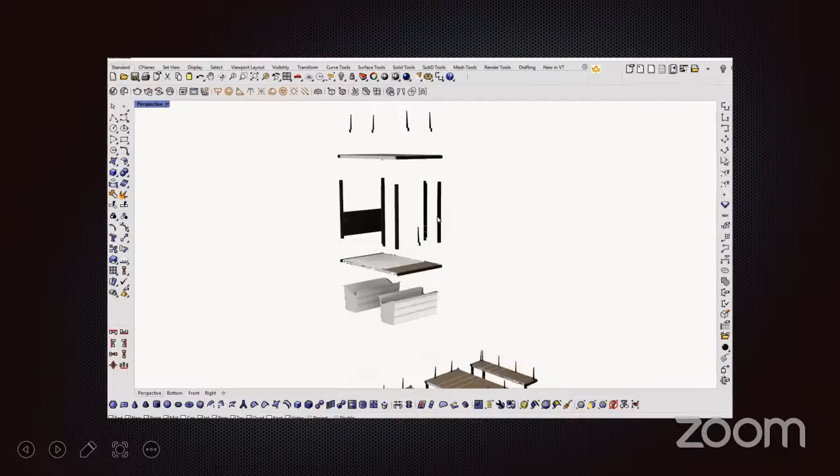Something more about the logistics. While the initial shipment has been organized with already built modules to better control the quality of the finally assembled boat, at an IKEA-style shipment, you mainly take the boats apart because it's very easy to assemble, and this cuts down the logistics.

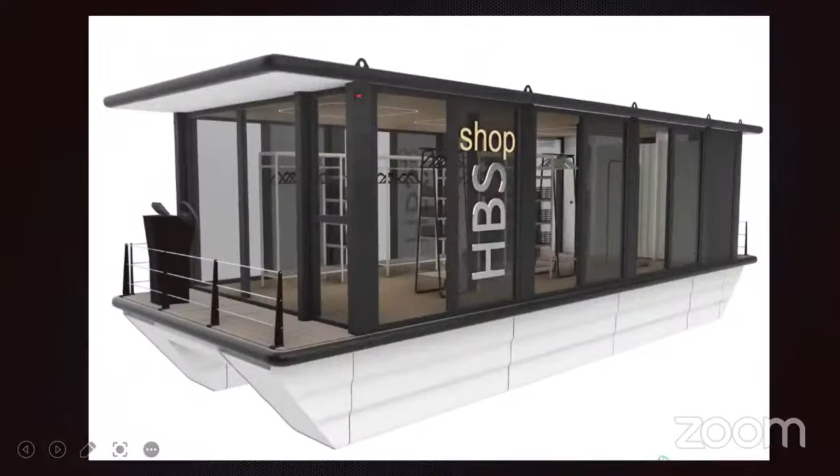Keep in mind that we believe the object will be a game changer and a sound example for the urgent objectives that are required in the process.

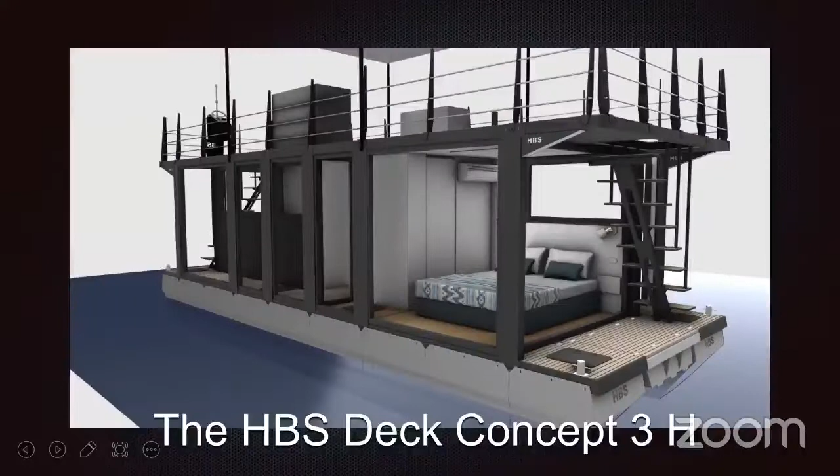I am personally pushing for a collaboration with a Spanish company that produces semi-transparent solar panels to make this structure electrically self-sufficient, while preserving the lovely views and better controlling the climate within the module.

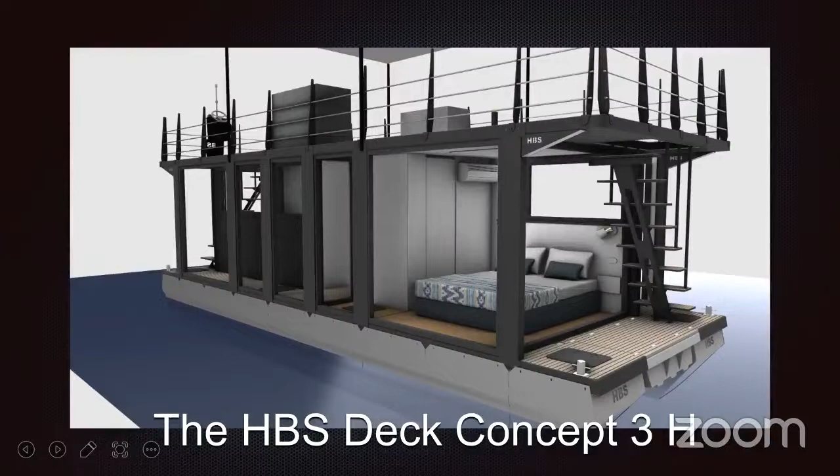Blackwater is connected into two 1,000 liter tanks. These tanks can be emptied in any marina using the marina's services if you're placing it there. But in the future, since it's a modular structure, the idea is to add a module which treats the liquid waste and turns it into completely biodegradable water that can be offloaded in the sea. No toll on the environment.

As far as the cost, I might say it's very affordable at this stage for the market, compared to the average cost of these kinds of products in the market.

The idea, however, is for my company, the HBS production company, to have it produced locally in Southeast Asia if possible, so that we could cut down the cost and at the same time reduce the toll on climate and logistics by having it present right where it is. That would be definitely easy for us.

Some more pictures about the interiors. Those are all renderings. The first boat is floating in Italy, and as I said, the other boats will be coming soon and will be visible on this side of the world.

All the above characteristics translate into a system that, irrespective of its final use, protects the initial investment and allows the versatility and resilience to change. That, in my opinion, is a must for any kind of structure, on water or not.

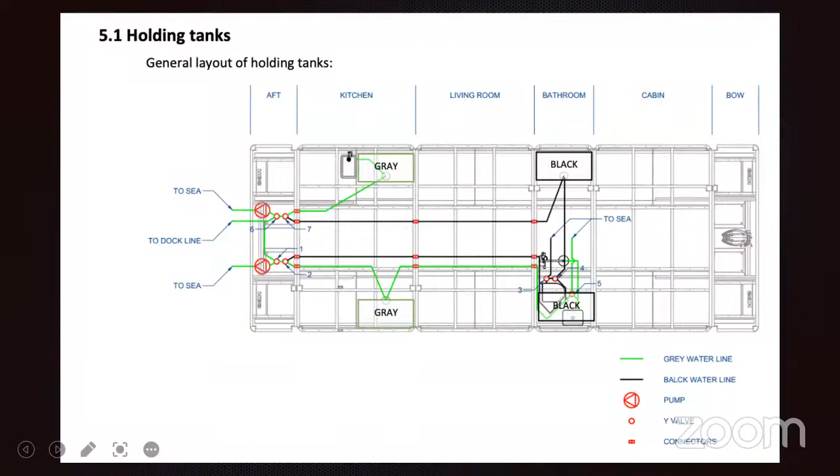We were talking about this with farms and everything, so we could use this as an option to add to farms, to give the logistics related to that, for people to live around, for example.

Floating hotels and villages, that's the last point I'm going to talk about. Imagine a worldwide connected network where guests will find the same level of comfort and familiar atmosphere, but in many different places.

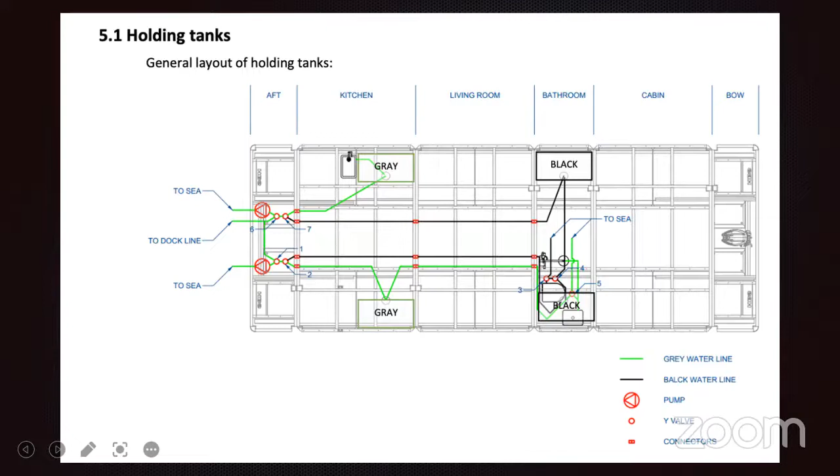So this will function as a probe to advertise this kind of solution in Southeast Asia. While in Northern Europe this is quite a consolidated, floating reality, as we were saying, perhaps leaving fewer opportunities for us. I think in Southeast Asia we have to work harder at connecting the suitable stakeholders to funnel energy and funds into the water, for sure, on the water today.

With the hope that my presentation has stirred some interest with you, I thank you for your kind attention. Thank you.